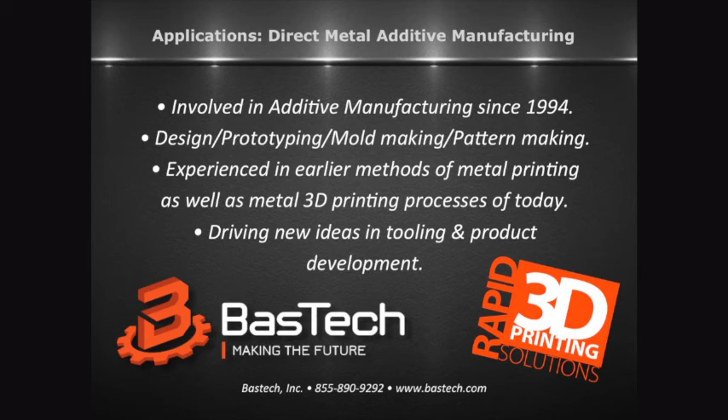I was asked to come out today and talk a little bit about applications for direct metal additive manufacturing. For those of you who are familiar with Bastech, we've been involved in additive manufacturing since 1994, doing design work, prototype, mold making, pattern making, show models, all different kinds of things using additive manufacturing as well as subtractive.

We've got a lot of experience early on in methods of doing metal printing. Unfortunately, a lot of those have gone by the wayside because of complexity in the operations. What we are doing today is getting back into the metals. We are doing a lot of work with UDRI, GE, Unison, getting back and defining where metals printing is going to take us in the near future, driving new ideas in tooling and product development.

Today, 3D printing has come a long way with materials, with methodologies. In the metals world, we are capable of printing in cobalt chrome, titanium, stainless, and a wide array of different materials that allow designers to really think about what they're doing and utilize the best material for their solution. With minimal post-processing, conformal composite design, as well as lightweight structures, we're opening up a whole new world to how we are doing things in the manufacturing world.

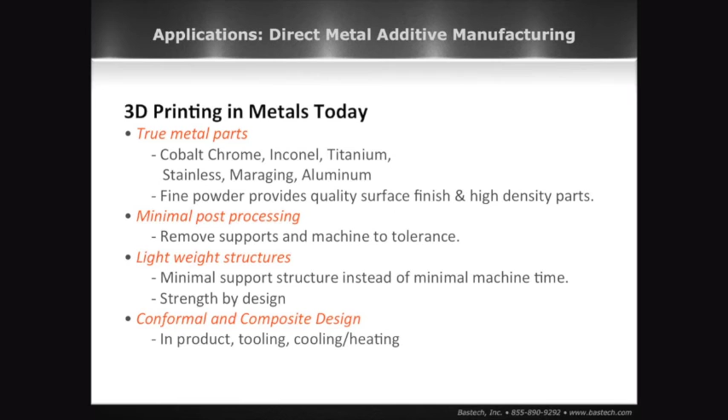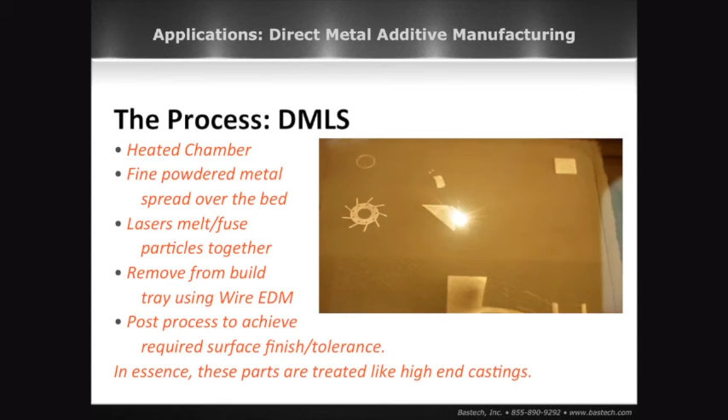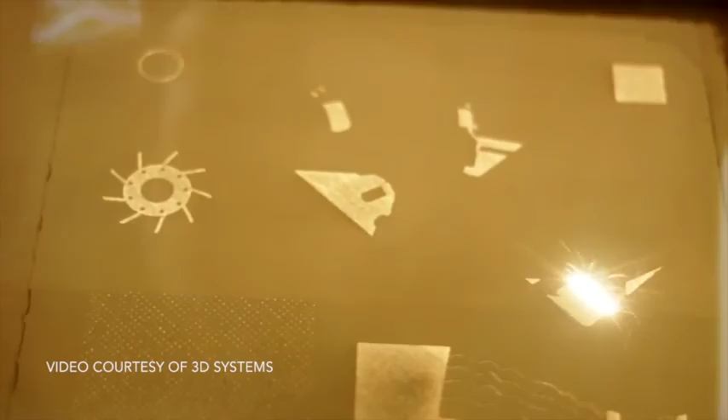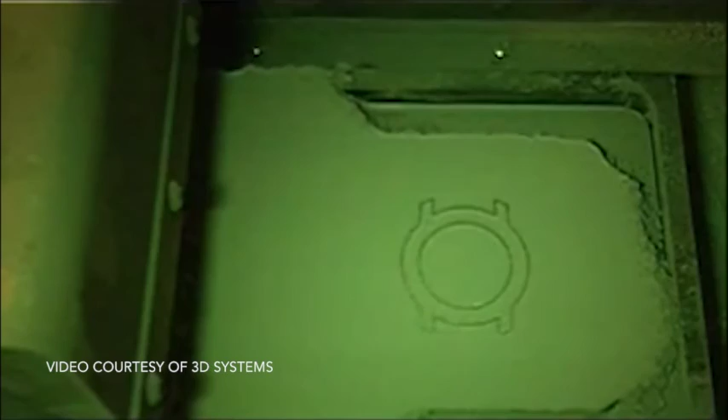If we take a look at the process, the DMLS process is really fairly simplistic and complex at the same time. We're working inside a heated chamber, laying a fine powder down over the bed and bringing a laser in to fuse all of the material together. Once the material is created into a part, we can take that off the build platform using a wire EDM process, and from that point we can utilize CNC machining, traditional methods of polishing, machining into tolerance, anything that we have to do to finish the given part.

Capabilities, again, we're going back to some materials here, and you've got a nice list of materials, anywhere from cobalt chrome, different Inconels, different stainless steels, depending on what you're looking for. Again, we've got a wide range dealing with motorsports, commercial products, aerospace, biomedical. It's really up to you what you want to use it for. We've got materials for you.

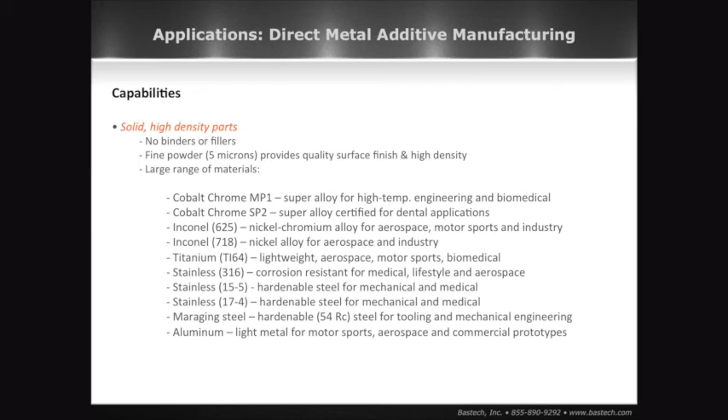Advantages that we've got right now is there's no binders. The powder is really fine. We're looking at powder that goes down to 5 microns, which is just a fraction of a human hair. So it's a fine powder that's laying down. That helps us get a high density part as well as fine surface finish.

Looking at the precision and repeatability of these machines, we are able to build parts and repeat them over and over again, holding tolerances down to plus and minus 5 thousandths. A lot of castings can't even hold that type of tolerance. So this is a good method.

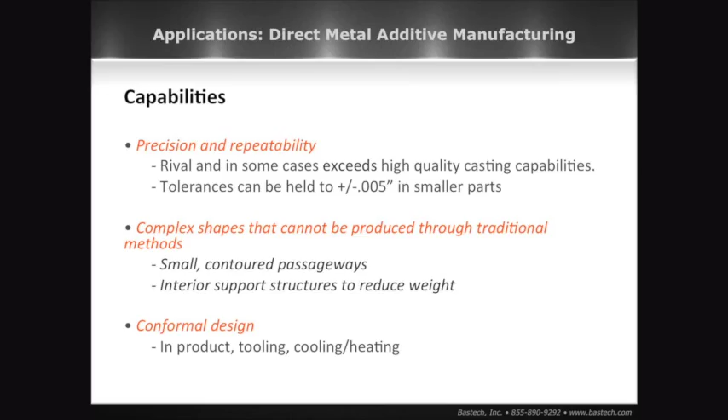We can utilize machines that have multiple lasers so I can get the builds to come off faster. So production is a possibility now, as well as being able to work with complex shapes, contouring, product. Maybe I couldn't build it before because of the complexity of the dies, but now today I can do it in a DMLS process. One process, it builds, it's done, and I can move on with it.

Conformal design is one of the things we're going to get into a little deeper later. Conformal design allows us to wrap cooling and heating channels around a part, giving us better thermal conductivity in the tooling. It gives us the capability of conforming product around tight areas. Maybe I need to create a manifold, but I'm in and around a lot of other components. I can still create that manifold, it's just going to be a very non-traditional looking component.

Getting into some of the applications and why we're doing what we're doing. If you take a look at machinery, special machines a lot of times have components that are very low volume, to say the least. We're talking 1, 5, 10 parts. And for these products, I may still have to make dies for them. I may have to do different tooling processes to get them.

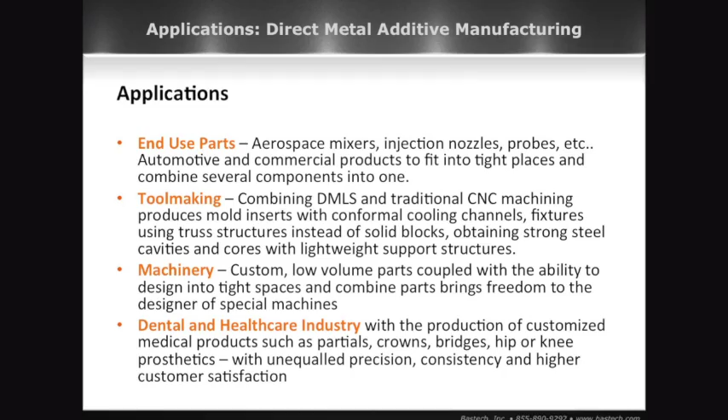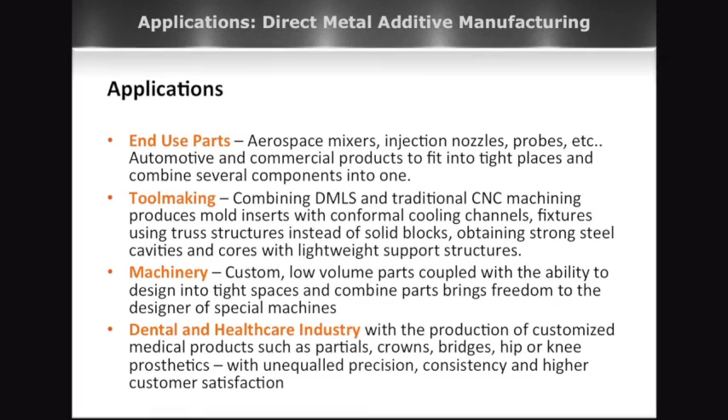The advantage is I can define them. I can make them customized for my machine. I don't have to buy something off the shelf. I can make it very custom and still get low quantity with high quality.

Dental and healthcare, you can imagine this is all very custom fitting type things. And, we'll get into this a little bit more later, but I can do a lot of different things, and again, I'm dealing with custom, low volume type applications.

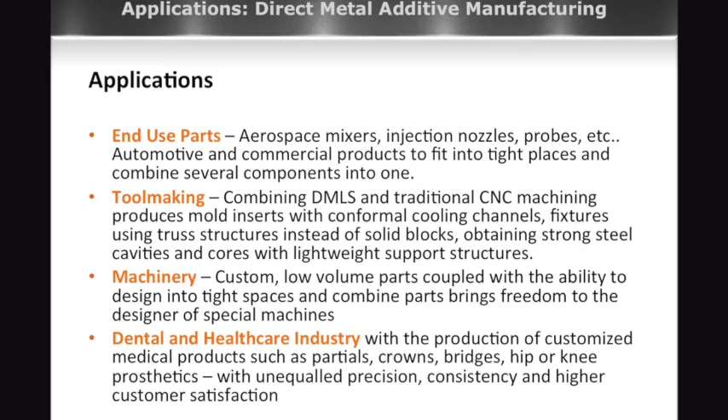End use parts, this is one of the most common things that are coming out right now with machines that have up to 4 lasers in them and can actually build 4 parts at one given time or focus 4 lasers on one part to make it build faster. We can do a lot of different things fast. And that's where a lot of the end-use parts are going to come in.

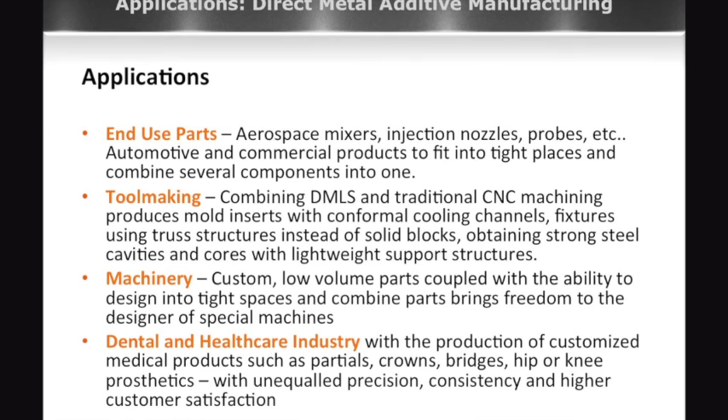The repeatability, the tolerance that I can maintain, as well as making parts maybe not as fast as a stamping press is going to put them out, maybe not as fast as I can do in some methods, but for low volume, it's very economical.

Tool making, again, this is another item we're going to get into a little more, but knowing that I can get better cooling, knowing that I can be more efficient in how I'm producing my tool, knowing that I can eliminate some of my traditional processes helps me to provide tools faster, more economical to our customer at a really reduced overall cost, not just in the tooling, but with the production of especially injection molding. I'm going to have less scrap rate and other things of that nature. Cycle time is another one.

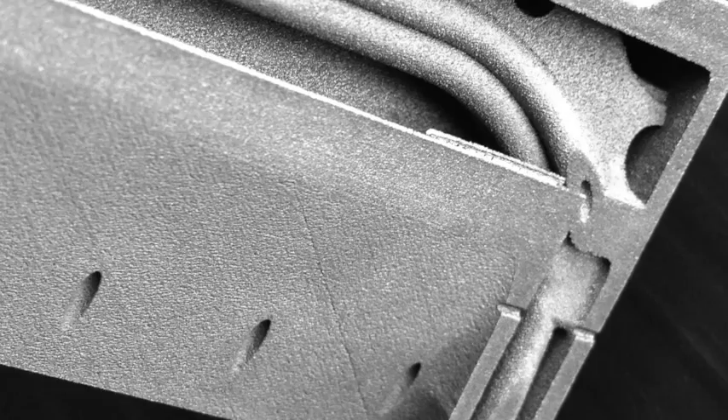Talking about the end-use parts, I've actually got a part up here today. We made this part fairly recently, and it's a really good example of what we can do with DMLS. This part gives you an idea of the surface quality that we can get off of DMLS. You can see on one side we've actually cut in so you can see inside, but you can also see the finish. And this has not had anything done to it other than we took it out, we cleaned it out, got all the passages clean, and then cut it so we could see what was going on inside. In this particular one, we had a defect that we actually caused in the post process. We needed to see what it was.

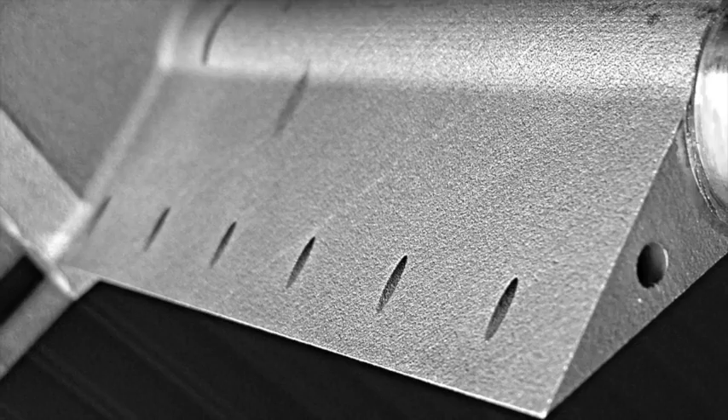Well, you can imagine a small 35 thousandths diameter hole running through a part. It's very difficult to clean out, but using vibratory tables, using heat technology, using air blowing in there, we can get those areas clean. I've actually gone down to as low as I think it's a 25 thousandths diameter hole now. So a lot of different things that we're doing.

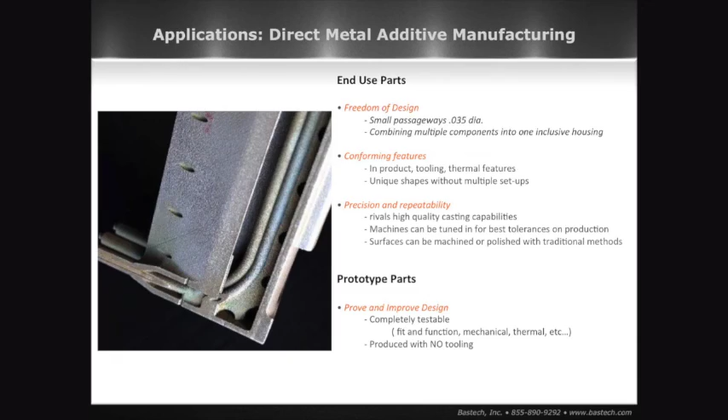If you look at this part again, I'm adding multiple components. This part actually has 6 tubes that are inside, and if I were to manufacture this in conventional methods, I would have to make a 2-piece housing so that I could take all of the tubing, put the tubing inside, fit it all together, and then put another housing on the outside. I have a risk for leak. I have a risk for all different kinds of scenarios, as you can imagine.

By doing it in one piece, I can manufacture it, get it off the machine. This build time was actually fairly low. It took less than 10 hours to build. So it's well worth the cost of what we're doing.

Talking a little bit about mold making, we are working with UDRI, GE, and other companies right now to figure out where we are going to go with the tooling aspect of metals additive manufacturing. And, you know, Bastech has a long history of injection molding. Both the owner, Ben, and I have been injection mold tool designers and makers for years.

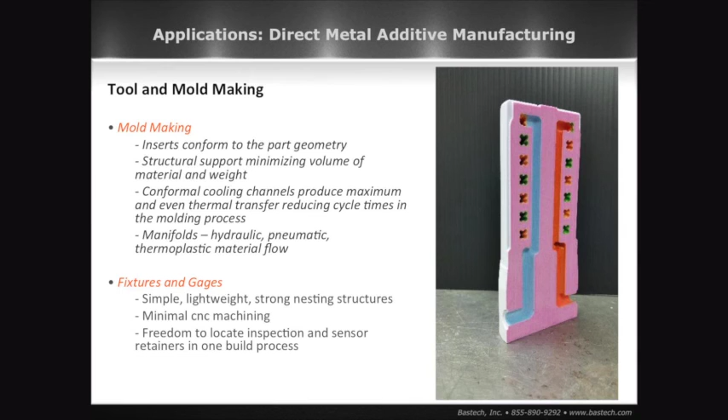If you've ever done fixtures and gauges before, a lot of times we'll take a fixture plate and lay it down, and we put a lot of aluminum or metal blocks building up, and then we CNC the tops of it. What if I can do simple pieces that I can lay down on their side and do physical structures, more of a webbing structure, minimize my material use, maximize what I'm doing with the component. I can bring it back up, set it up, do a quick finish machine on the top side of it. I've got my tight tolerance, I've got lightweight, and I've got minimal material use. These are all directions that we're looking at right now.

This is another idea of how cavities and cores could change. If you're familiar with injection molding, in this particular case, I have a cylindrical part that I'm molding, but what I'm actually doing is taking a 1-inch material piece all around the part. And once I have that 1-inch material thickness, I'm going in and putting conformal cooling inside. Again, I'm getting really close to my part area. I can have really close lines, and let's face it, while we've all wanted to, you've never been able to drill in that manner before.

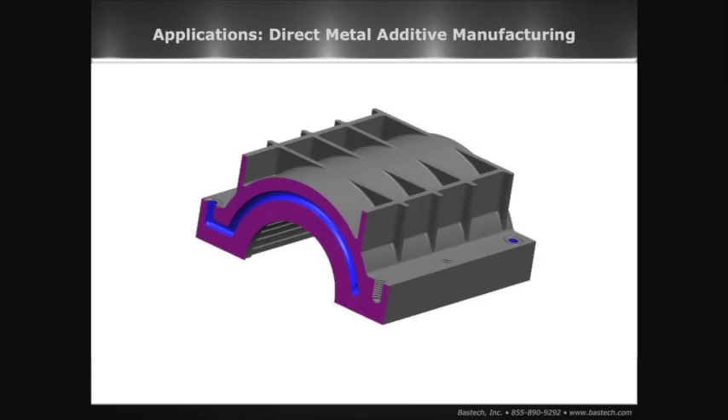So this allows us a lot of different opportunities. I do really want to go back to a flat square pocket again. I've got everything contoured around, but I can take some ribbing structure and just drop it down to my flat pockets. Just because I want a flat pocket, it's easier to mill, it's easier to get into the A plate and B plate. I don't have to fill it with steel.

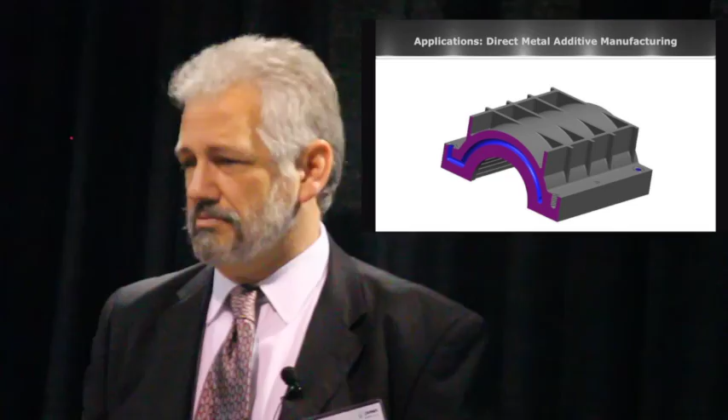By running a simple web structure down, I've solidified everything that I need. I've got my strength, I've got less material, it's lighter in weight, and I'm still getting the strength of steel. Good news is, maraging steel, I can go in and make the part, harden it, very similar to working with H13, and get up to 54 Rockwell out of it. So I'm getting good hard tool steel at the same time.

If we want to look at doing things more like a progressive die or a forming die, again, I can do that primary shape. I can put the strength where I need it and then start webbing out areas where I don't need all of that. Again, making it lighter weight, a faster process for the DMLS, less material use. I start lowering my cost on the DMLS parts.

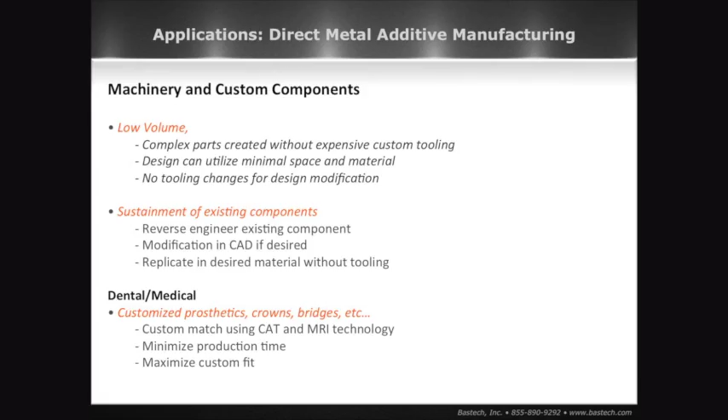In essence, some of the things that we are doing are really looking at rethinking design. If you look at everything that's going on, one of my last lines down here I really tend to like. A lot of people talk about getting rid of design for manufacturing. We're not getting rid of the design for manufacturing concept. We are simply adding a different tool in the toolbox. And in reality, this is what we're doing. Instead of a CNC machine, we're buying a DMLS machine. Instead of setting things up in multiple different machines, I can do a lot of things right in one process.

So if you understand the surface finish you're going to get out of your machine, if you understand the tolerance that you can get out of your machine, a lot of times you can actually reel in your tolerance just by building a part, seeing where you're at, and going back and saying, okay, now I'm going to dial this in and start running production and start making 4, 5, 10, 100 parts at a time in these machines.

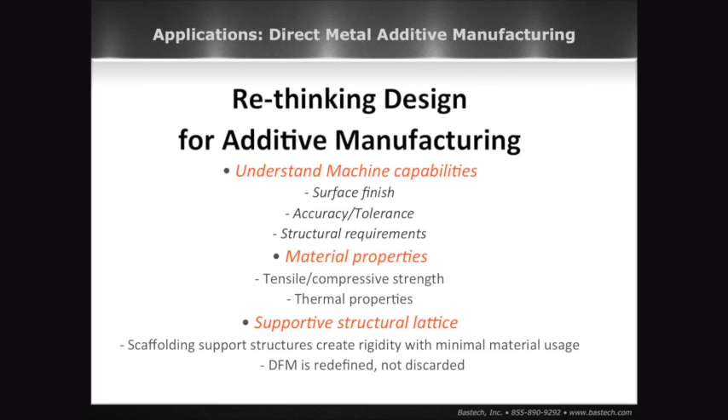Understanding the material properties. We look at all of these things as designers, and then typically we go back and say, okay, well, I have to machine this. I have a 3-axis milling machine. This is what I have to design around. I have to let my tool shop make it. In this case, we can throw a lot of that out the window, utilize the technology, and it adds one of the greatest toolboxes right back into our tool shop.

This is one of the optimizations, if you will, of utilizing DMLS. This particular part is just a wheel, if you will, or an impeller. But as these impellers grow in size, a lot of times I want to drop the weight. I need the strength of good metal, but I need to drop the weight.

I can take a look and say, well, if I drop my wall thickness down to 40 thousandths of an inch, the steel is still going to give me the strength that I need, but I can hollow out the inside, supply it with a web for strength, and build the part. When I'm done with the part, all of my excess powder comes out the bottom. I drop my weight, I use less material, and using less material, I actually build a little bit faster. This is what we're looking at. Maximizing strength, minimizing weight.

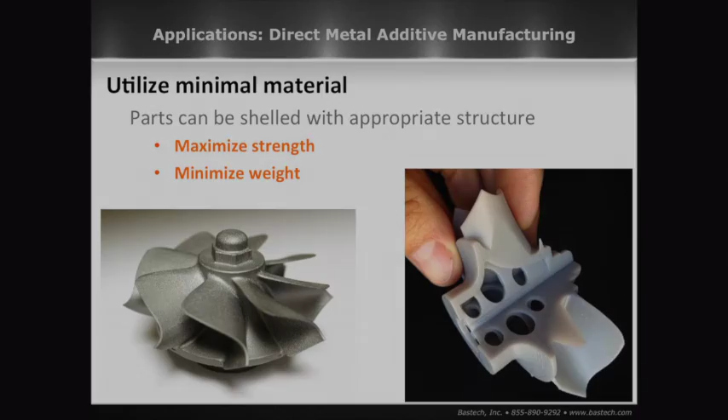I promised people I wouldn't talk too long. I know that we got a little bit of a late start. One of the things that I wanted to do was to make sure that we had a little bit of time for questions and answers. Does anyone have a question? Yes.

A lot depends. Now, if I look at this part, this is actually a very solid core. This part took roughly, I want to say 50, 55 hours, but it's a very tall part, and I specified I wanted it built standing up. Helps me hold concentricity and things of that nature. So in that case, it took a lot of time. To build this part, I was down in the 10, 12-hour range. Possibly even under that, I don't remember off the top of my head now.

But, you know, a lot of the time goes back to the part itself. If I can build the part and lay it fairly flat, time's going to go fast. Really, we're looking at how many layers do I have to build the part in, and I have a certain amount of time for each layer because I have to drag the material over top, pack it down, get out of the way, let the laser do its job.